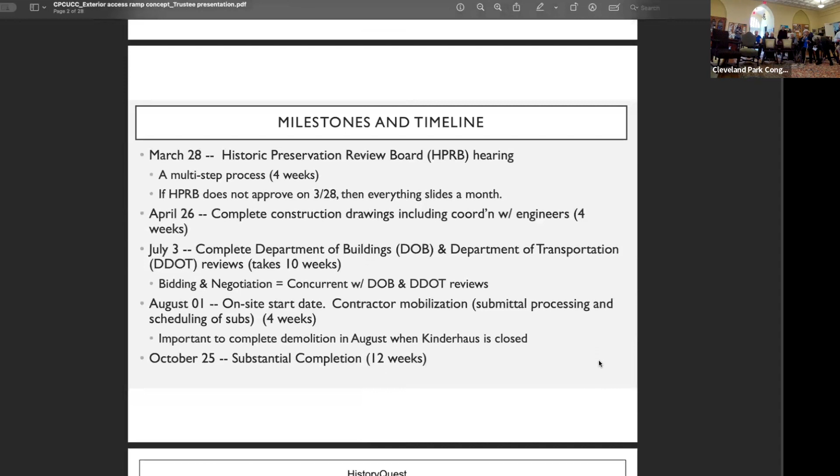We do have... you want to go to the slide schedule? Can you all see that?

So March 28th is the meeting with the Preservation Review Board. To get there, we have to go to the ANC and to the Cleveland Park Historical Society. From Mike, yes please. The acoustics in this room are terrible.

Okay. She said she's getting a microphone. She needed help getting outside.

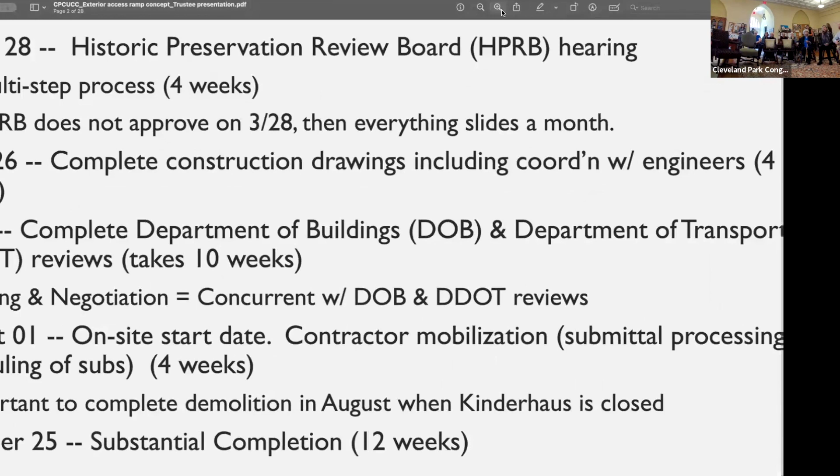So tomorrow night we have a hearing with the ANC's Historic Preservation Committee, and then the following Monday we have a hearing with the Cleveland Park Historical Society, their architectural review committee. We don't necessarily need their approval, we kind of need their buy-in. The Preservation Review Board gives good weight to their input.

We met this week with Mark and Serena, with the preservation officer for the review board, who was seeing the church for the first time and seeing the concept for the first time. Met with her for over an hour. By the end of it, she kind of understood better. She asked about alternative solutions, which you all looked at before. We don't know where she's going to come down, whether she'll be for us or look to have it modified. She brought up a couple modifications during the process that I didn't think were viable.

So say we get approval from the review board on March 28th, we need another month to do our construction drawings. So we'd be going in for permit end of April, also go out to bid at that time, and we estimate 10 weeks for approval.

At that point, that gets us to the beginning of July, and hopefully at that point we've got a contractor set up, ready to go. They need a month to prep and order materials, get drawings approved. So we're trying to get construction started August 1st, which is when Kinderhaus is.

And we estimate another 3 months to do the work. So done by winter, end of October, early November. Any questions on the schedule?

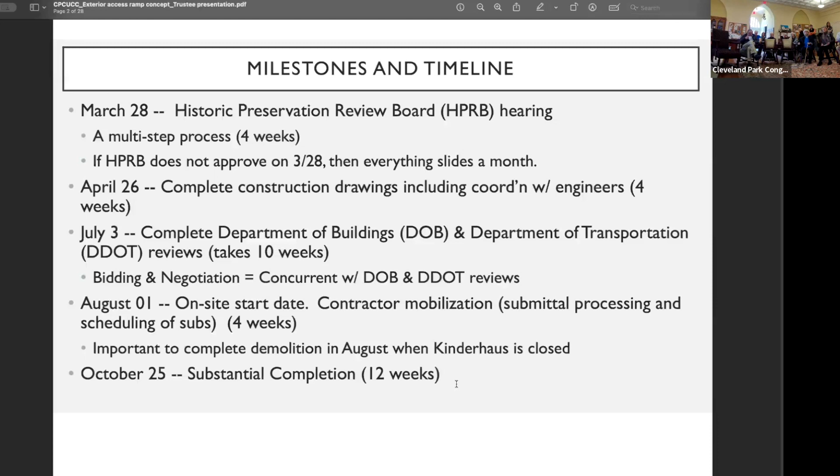Yeah, so if you want to, I mean, I'm sure you all know the drill. You've probably been through construction projects and dealing with the city, but yeah, the more letters you write, the more it'll help. And we can talk, I can talk to Mark about how to do that, and maybe he can post it.

That would be great, if we could be given the address to write to and what package to cite, so we can communicate support. And maybe highlight the high points as to what we should include in the letter. Thank you. Sure.

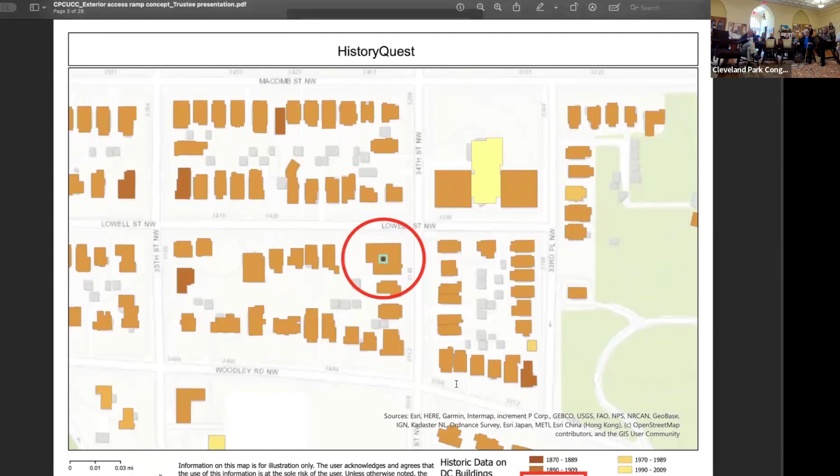This is the city's historic map. The church is a contributing resource in the historic district, which is why we're subject to the board review.

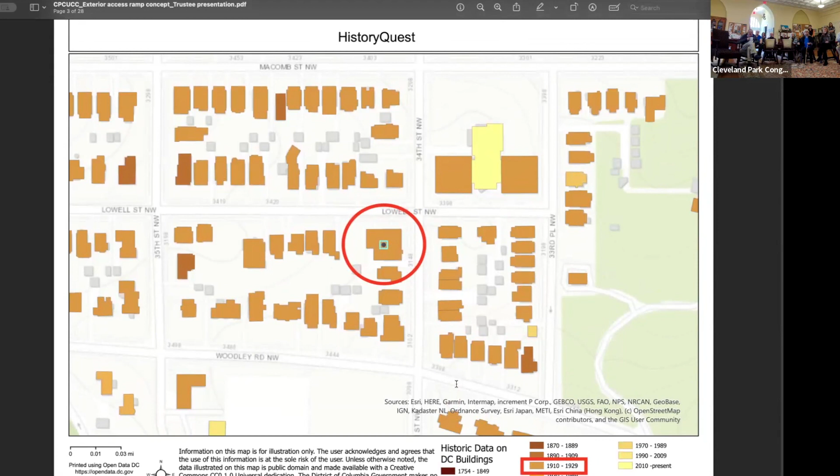This is, I guess, the opening. What's the name of the historic district? Cleveland Park Historic. Does Cleveland Park go... all the way down to Connecticut and up to Wisconsin? I have to check the map. Go online and see, it's mapped out online.

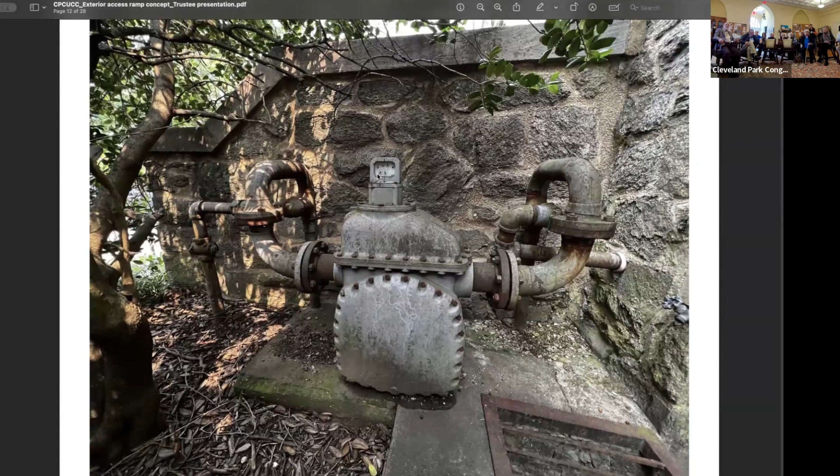There's that gas meter, which is one of the biggest ones I've seen. And this is where we'll modify that cheek wall.

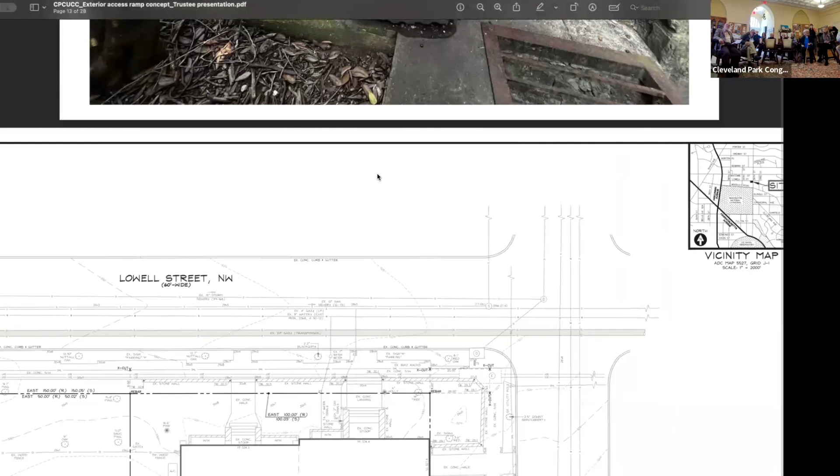This is a site plan of the existing conditions. The property line is about 10 feet back of the sidewalk. So we're getting both a permit for the work on private property and a public space permit from DDOT for the work beyond.

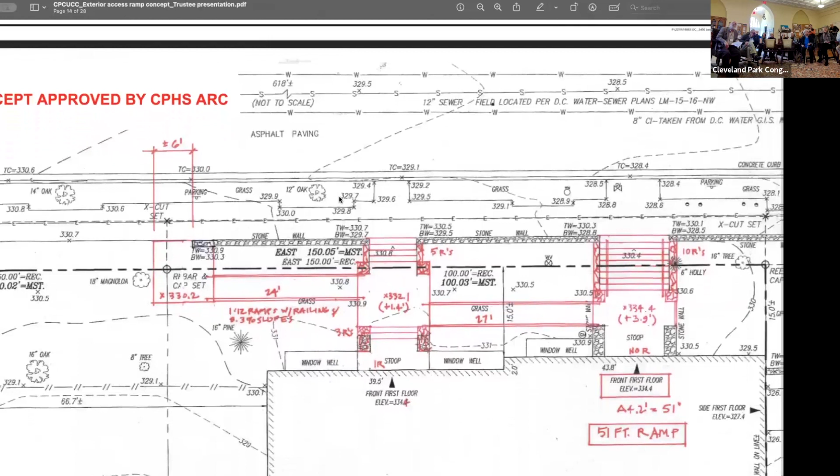So is that 10 feet the same everywhere in Cleveland Park? Probably not, I think on the avenues it would be wider.

This is the concept that you all had done, the prior architect had done, that was submitted to the Historic Society and that they approved. We've modified it a little bit, which I'll show you on the next page, but the basic concept is like that, except we're going straight. We need more run, more ramp run, and we're not going that far. We've pulled in to here.

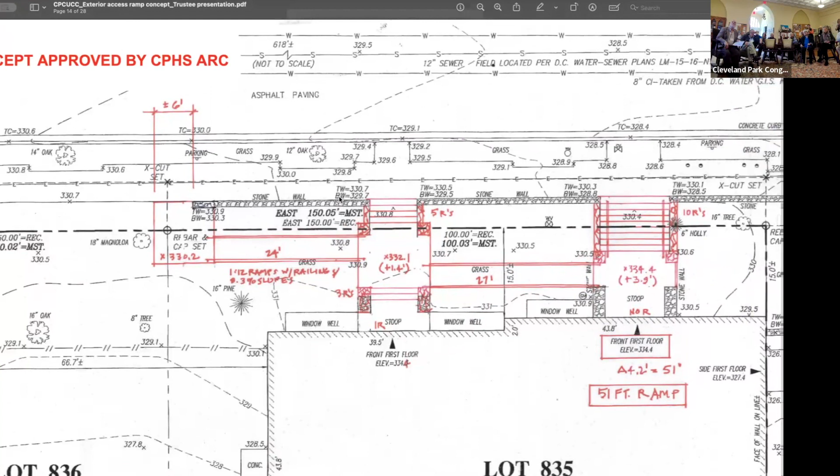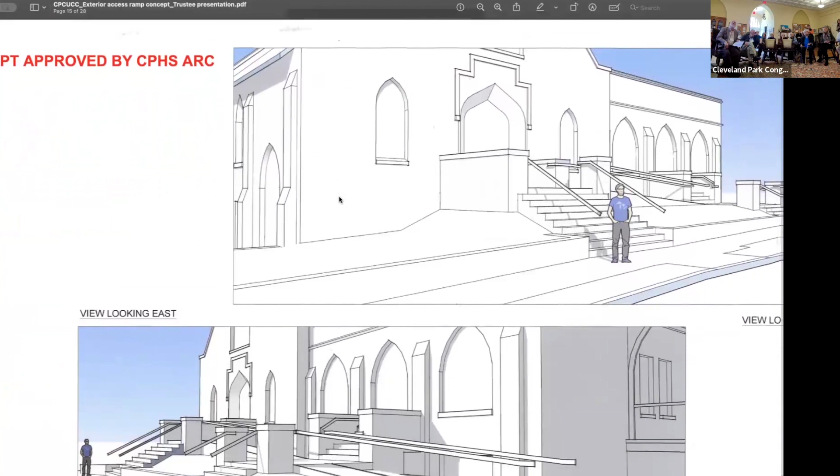Also by the prior architect, can you scroll up a little bit, Mark? We took out these piers, which we thought were just more noise on the elevation. It was too much, we want to keep the original features of the church and not have new ones like that out front.

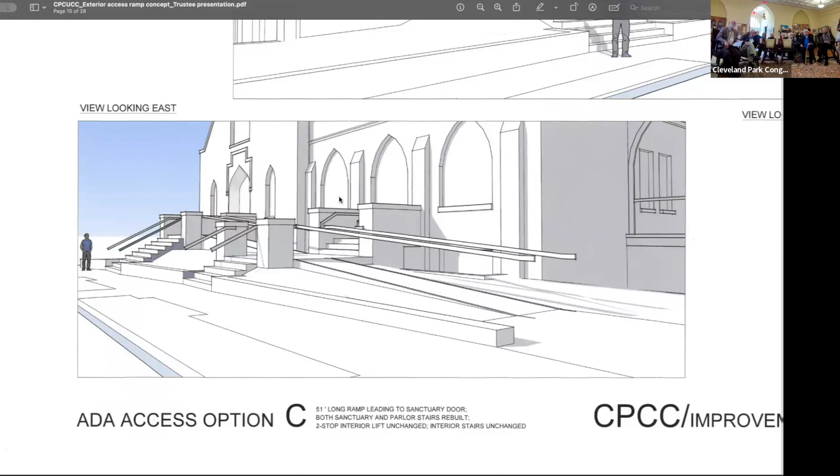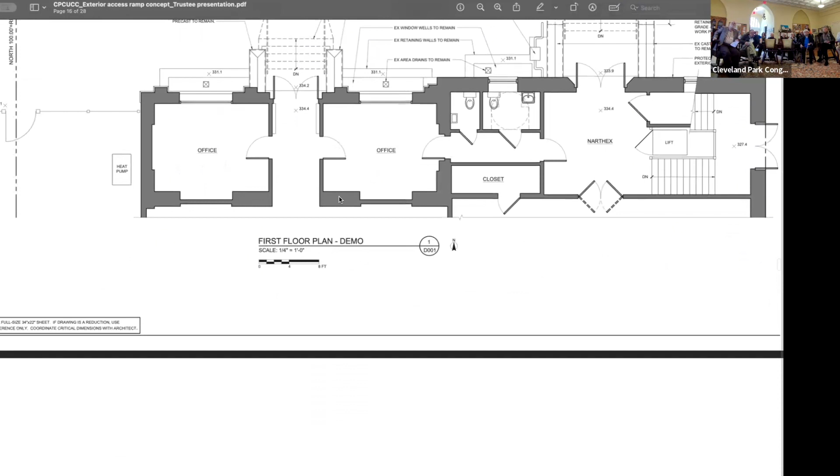I have a question. I don't know if there's any way, Mark, for you to reduce the size of that, because you can't really see the full expanse of the church, and I think it's around.

Can you show where the garden entrance is and how that's impacted by this? On the plan, I'll show you.

There's a Deodar cedar now. Is that going to be gone? It will need its... it doesn't have to be gone. We'll show that on the plan too. A lot of lower branches will have to go at a minimum, and we're into the root zone, but only about 25%. We're fairly shallow with the excavations we're doing.

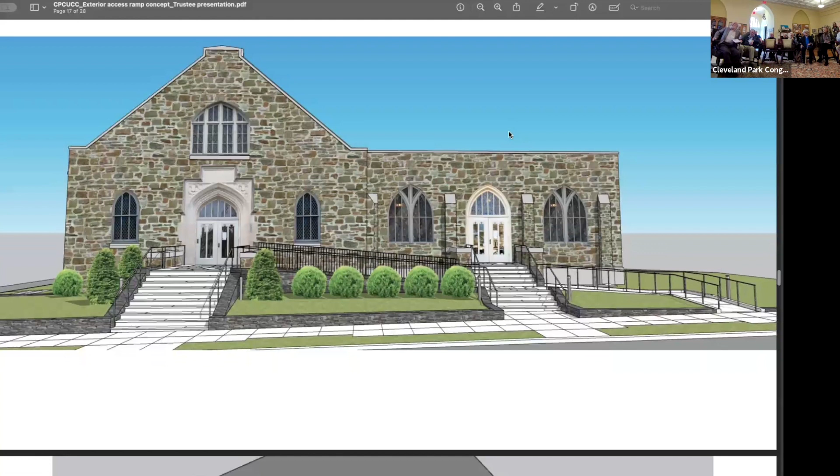I have an open mind about it. I planted it 28 years ago and I really like it, but I wouldn't have planted it tomorrow because I'm now a convert to native plants and it's from the Himalayas. So it's native somewhere, but not here. So really she's wondering if it can go. I do love it, but change happens. Well, do we put a new one? I love it too, and I would lay down in front of any shovel. That's silly, I'm allowed to love whatever tree I want. Immigrant trees, I love the fig tree as well. I don't think they're from the Atlantic seaboard, are they?

Anyway, I think I will leave that call to all of you, but if I were doing it, I think we come in with a new tree over here or a new tree in here somewhere. So can I just see how it begins? Oh, so the tree is right about here. Yeah, yeah.

So could I ask a question? I like your drawing better than the original plan, I think it's more attractive. My first thought when I saw your wonderfully communicative drawings was, why is that a right angle sidewalk there? Could you, I mean, I know everything is so nice and straight so it suggests a right angle, but a curve is so pleasing to the eye. And maybe it would take us farther up the sidewalk. Oh really? Yeah, yeah, we need that to get up to there.

She was saying a curve instead of a right angle. Yeah, I understand. It's just a curve, right there. What if you curved just here, it would mean the curve would be on the flat probably, but it would take us out over here, we'd be farther out. Well, maybe that would be okay, but you could curve the inside maybe and not the outside. It would just be so nice for landscaping, I would think. But it would affect the garden farther to the west if you put it farther. Oh well, anyway, I think it looks fine the way it is.

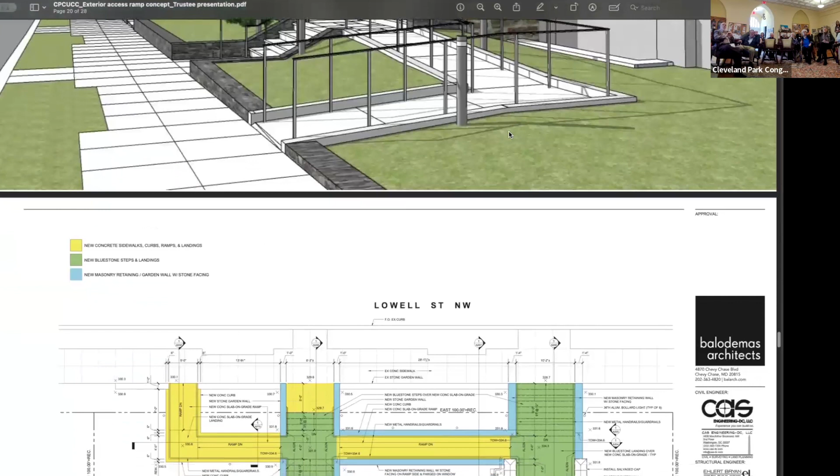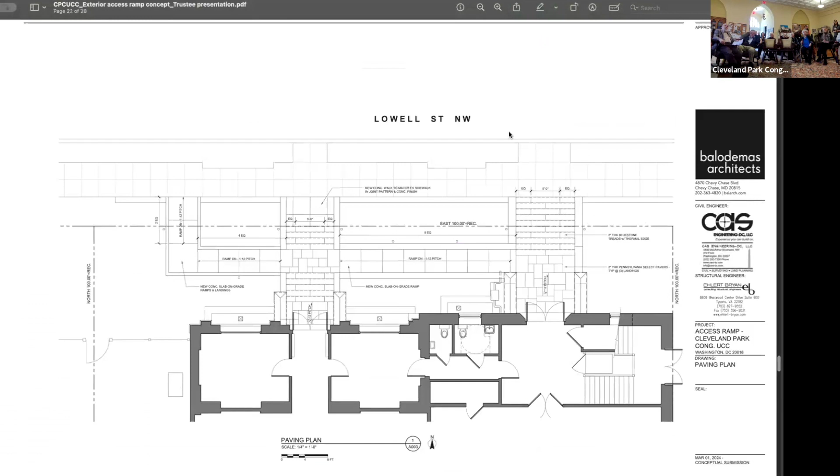This just clarifies the different materials. The green is the flagstone, the yellow is the concrete, and the blue is the new garden walls. Just a paving plan, nothing new to show there.

That's what you were asking about, the stone facing on that wall without the bushes in front. Will the facing continue on the back side between the ramp? There won't be any back there, right? That side we're just going to parge and paint rather than spend the money on stone.

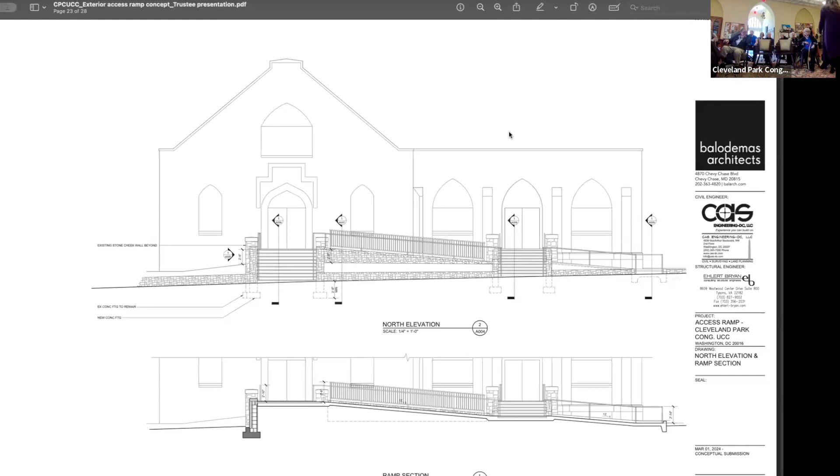And then the rest is just where we are with the details that we submitted.

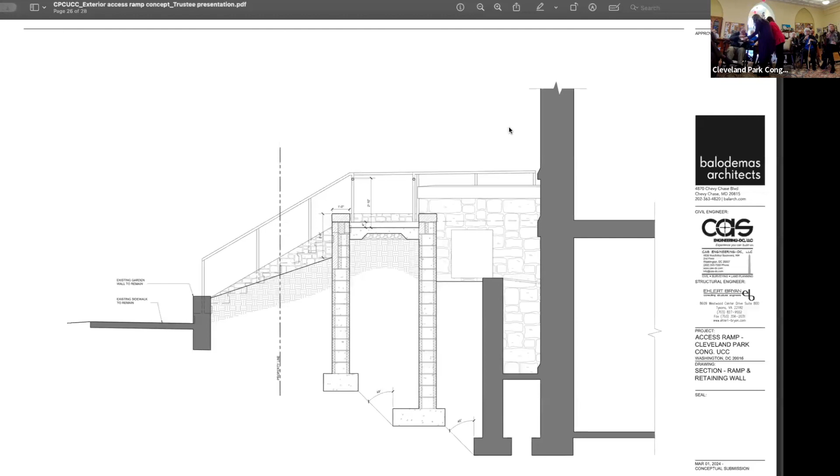That's the wall you were asking about, the foundation wall. This is the window well. We don't know exactly, but we think the footing is as deep as the well, as deep as the foundations of the church. Scroll up a little bit more - no, sorry, the other way, a little more, bigger, back, right there.

So we have to bring these new footings fairly close, so it's going to be a large excavation happening out front. How deep is that footing? Not the existing one, the one you're proposing. It's only going to be 2 or 3 feet up from the church footing. So how deep down is that, do you have an idea? Ten feet.

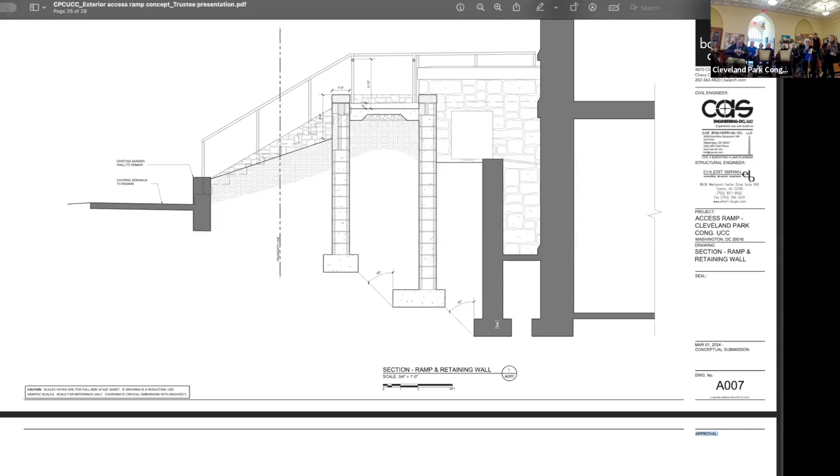And then 8 out here. The backside of this will just be parged, but the stone will be towards the ramp and the street-facing side. And how many of those footings do you have along the ramp?

Let's go back to the floor plan, the color floor plan. So those footings are here, here, here, basically here - well, this doesn't, it's just the blue would be the footing. But the entire length of the ramp will be excavated, the whole upgraded section all the way down.

So structurally, that's gotta be over designed. No, seriously? I mean, you don't want it to move.

And if we take it only 2.5 feet down, that's the zone of fill of the original church. We could make an assumption that it's settled as much as it's ever gonna settle. But if we're doing it right, we need to take it that deep.

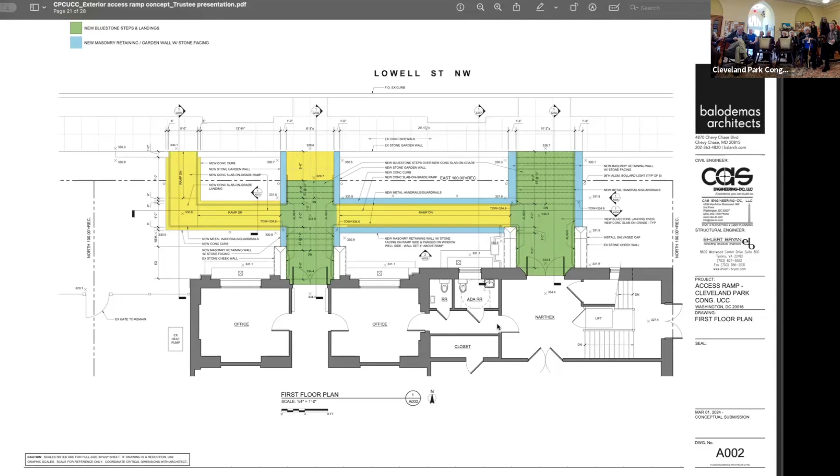Pretty rocky. Yeah. We're good. Go back to the section, Mark. Go back to that section we were at before showing the footing.

One more, here. So by putting it this deep, we are not imposing additional load on the wall. Yeah, that one, okay, I can see that.

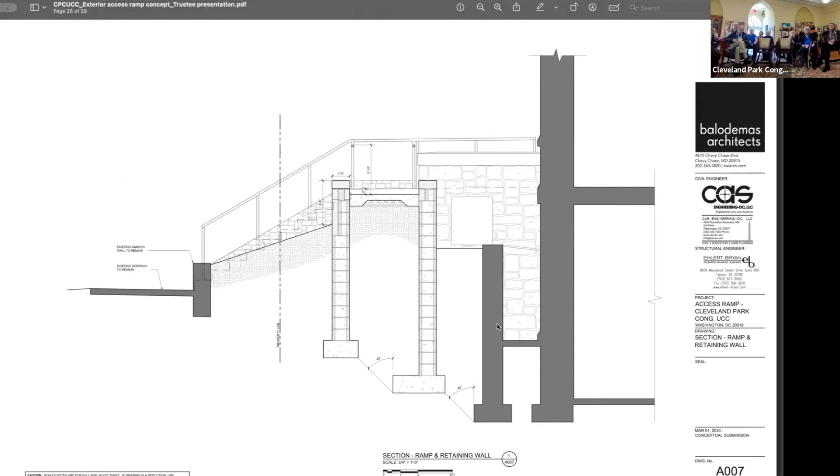I mean, the shallower we dig, the less expensive, I'm assuming. Yeah, marginal—I mean, if you're digging that much deeper, it doesn't matter that much.

But if we could be up here, it would make it bigger. You can't do that shallow, or it wouldn't be stable.

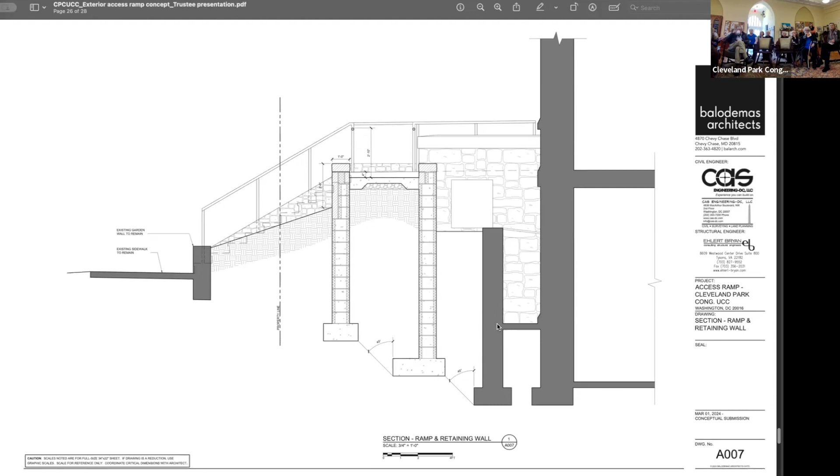We'll do the best we can, and that might come down to determination when they start work. We'll price it under one set of assumptions. If we start digging and find where this footing is, that it's higher, then we can adjust at that point.

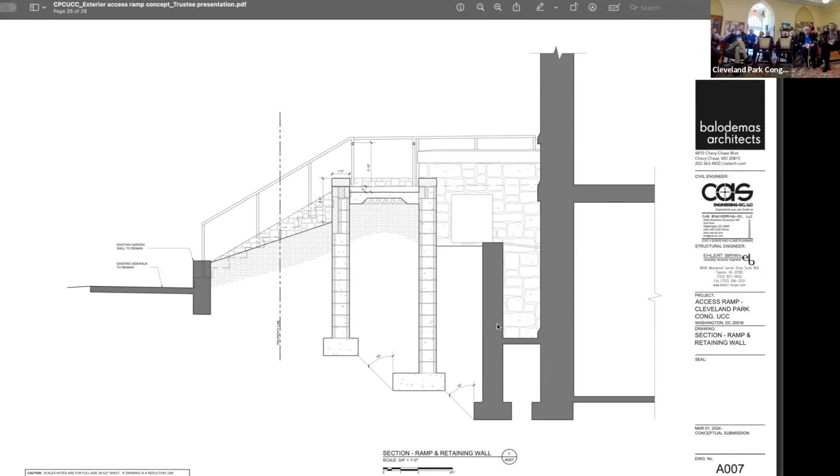Get credit. And that's gonna be in the specs. That's just detailed through the lower approach.

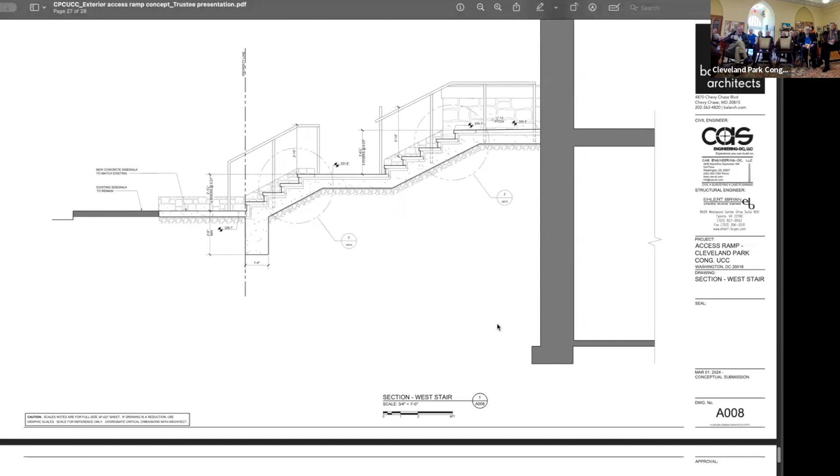I think that's the last one, yeah. Okay, what other questions?

To Catherine's question, on the lower ramp where it showed it in yellow there—go back up one, or even there—is it possible, I understand that a curve would make it bigger, but is it possible to round off the inner corner? Just so it's easier to turn the corner with a wheelchair.

We'll look at it. Sorry—if you have to go all the way up to the corner and then do a right angle turn with a wheelchair, it might be challenging, but if you just kept that external corner the same, I don't know if the elevation would allow you to round it off on the inner.

So we have to make the turn on a level surface, because there's too much elevation otherwise. Right, so we need a 5x5 level surface to make the turn.

So it'd be big enough. So if we bend the ramp, we can't level out and bend at the same time.

But you can put an inner radius in that's not big, if you did it here—that transition, you'd have to push it out. You gotta trust me on that.

Yeah, because we can't warp in two directions and keep the landing flat. The landing is level, right? So if we start the radius back here, now we got that much more level surface. Oh, you just have some super elevation to play with.

It exceeds what we need for ADA. Basically, yeah, in order to make the turn, you would have to drag this out and make this landing bigger in order to get an inner radius here.

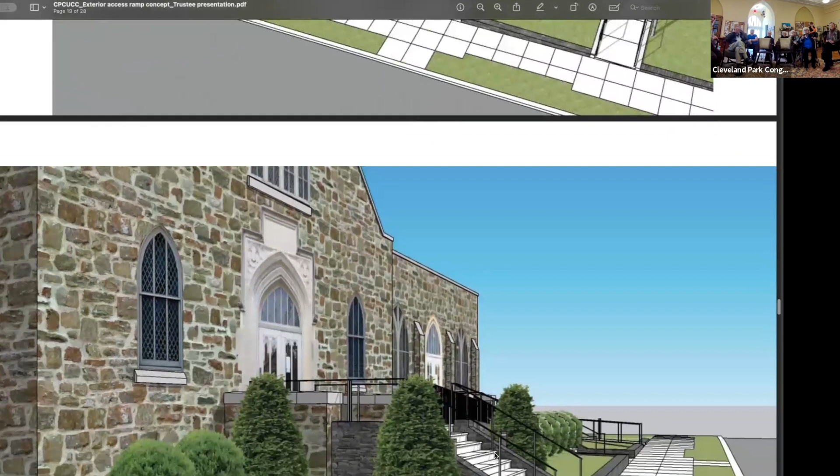I just wondered about children falling through. These are 3 or 4 feet on center. The fall hazard up here is, you've got a bad fall hazard now because the walls are low.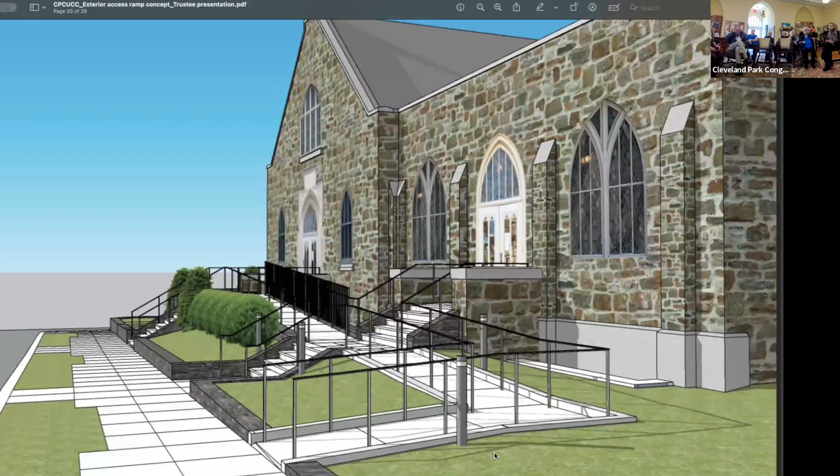When you come out of church, we're going to carry the new handrail all the way to the wall of the church to improve that situation. From there down, it's a 30-inch drop from the steps to adjacent grade, which is the limit where you don't need a guardrail.

You talk about the rails there on the entry to the church? Up top, right now the handrail stops there. I think some people might feel a little unsteady getting from there to the door, maybe it's slippery, so that's where we're carrying it all, extending it to the wall, to separate the distance to the drop more.

It's a 30-inch drop, just about the drop you'd have from a normal table. Yeah, same as this.

So we're looking forward to tomorrow night. We'll have a better feel for where the ANC is coming tomorrow night. Hopefully the Cleveland Park Historical Society won't change their prior ruling approving it. They were unanimous when they approved it before. The ANC is tomorrow, and the ARC is the following.

We won't have the staff report, since the preservationist does a staff report, and we won't have that until a week before the hearing.

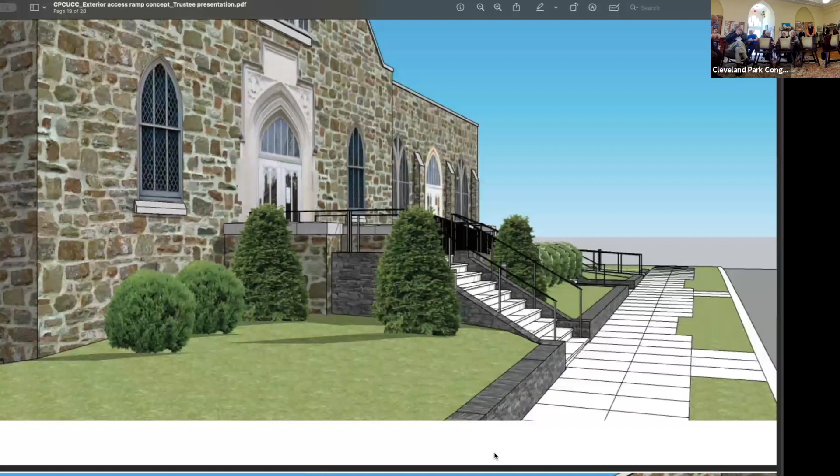Just going back to the ramp and the gradient. We were talking about that it's 1 to 12 and that's code, but are you confident that will be workable, not just for wheelchairs, but also for people with walkers or other assistive devices? My mom uses a walker, my dad's in a wheelchair. My mom can handle a 1 to 12 ramp. My dad doesn't have the strength to roll up, but with me pushing him, I can get him up fairly easily on a 1 to 12.

I have to say, one of the things I like about this proposal is, working with my own parents who are still reasonably ambulatory thankfully, if they're going to come out of the church, leave the sanctuary and have the option for the ramp now, they're going to take that safer option. I love that that's now going to be open to anyone who chooses to come and worship. It's going to be an easy, less challenging path.

I hope it will attract families with strollers. Yeah, the other thing he hasn't mentioned is most of the time you're not cheating to go flatter than a 1 to 12, you're cheating to go steeper. So the 1 to 12 is tried and true, and almost everybody can make it up and down.

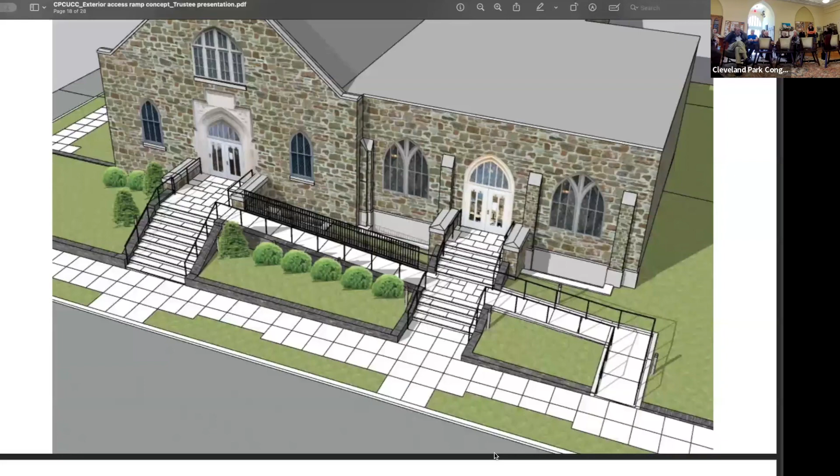Going back to that garden entrance, it's right next to the right hand side. Oh yeah, I forgot, sorry, it's right next to it. Can you go back to the site plan? Sorry, I forgot that, the color. Okay, I think it's on there. There's the gate, the gate's right there, so you're still 8 feet away from the gate.

I see that, yeah, I think this is 5 feet, isn't it? Or the edge of the walkway. Here's the edge of the building, and this is about 5 feet over. And then this part is 5 feet wide, right? And then this is 4 feet, to give us the 5x5 turnaround that we need right there. So the cedar tree is right there.

Good? Take a look outside. Do you live in DC? I live in Chevy Chase, Maryland. They have senators and all that stuff.

Yes, it does. Okay, shall we go? Yeah, let's go outside.